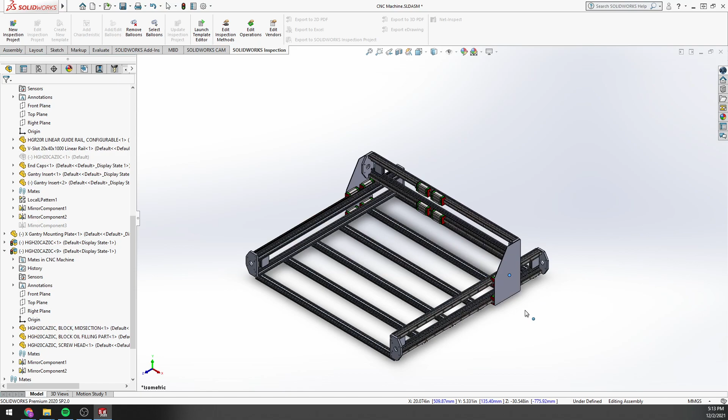You'll notice a handful of stuff still missing from this, and hopefully with my part two update all of these will be included, but we are going to have the motor mounts either here or on the back side. I haven't determined which side I'd like to mount - I'm thinking the motors on the back side, so I have nothing sticking out the front. And then of course I'm going to be using a ball screw through here.

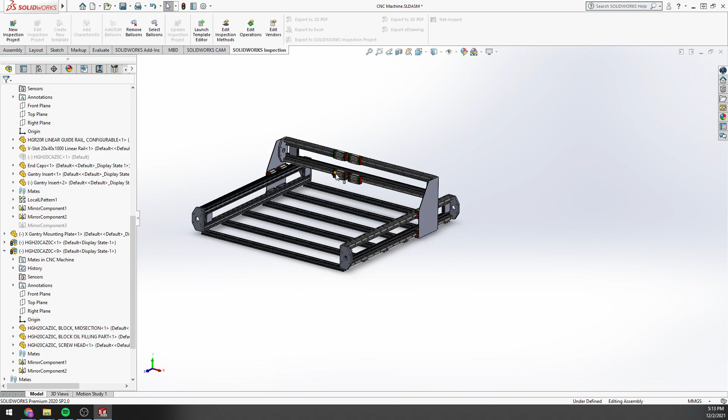In addition to the X and Y axis, we do need a Z axis, and I haven't actually designed that yet, but it will probably be very similar. In fact, this gantry for the X-axis and the Y-axis gantries are the same exact one. I'm foreseeing the need maybe to...

Change some of the design up here. I may have to exclude this and go right to the 80/20 from these mounting plates, but I'm not sure yet. Some of the things I'd like to address are the fact that I don't have ready access to a CNC mill or a laser cutter without spending a decent amount of money. It's not something I'm looking to do.

So these plates in the front and the back for the stepper motors may be cut out of plywood and drilled out, or maybe if I have some maple or oak lying around that I can use, because those might be more rigid. I might make those out of some of those and do printed templates, trace them out, cut them out, and do hand drilled holes.

Of course, that doesn't really give us good precision. I can use my drill press, but it's not going to give us precise measurements for where everything goes, and we may end up with some binding or other issues if those aren't good, as well as the side plates. If we don't have all the holes very accurately drilled out, it could cause some skewing in future parts we make. So if we go that route, the best option would be to try to do any sort of software corrections for skewing if possible.

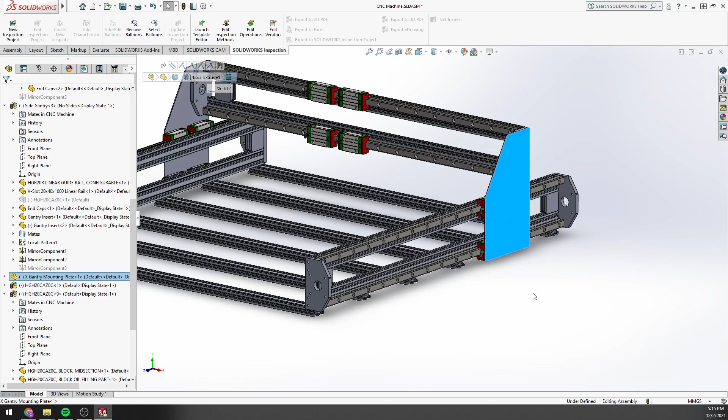You'll also notice there aren't any holes in the side plate. That's because I'm not done defining where these holes need to be, and the mounting holes for the gantry here.

No. Oh, that's interesting.

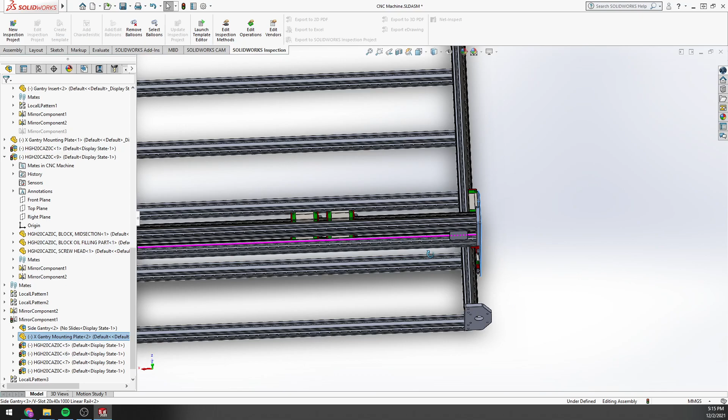These are not... I'll have to look at that later. Maybe I just rebuild it. Nope, these are supposed to be mirrored, so they should be in line with that. For some reason, they're not mirrored properly.

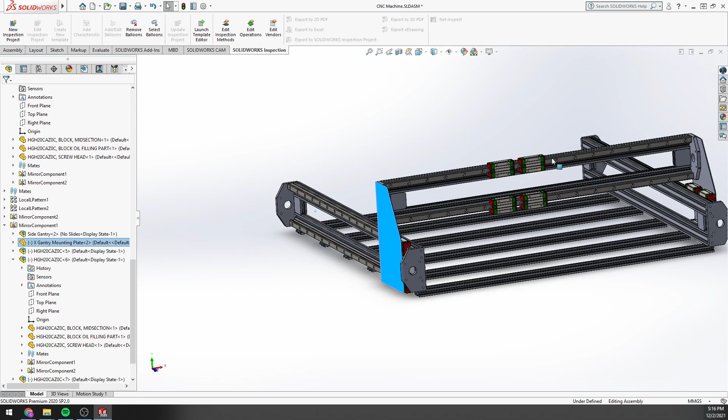Okay, so looking here, this design with the two linear rails and the lead screw down the middle is going to be the same that we're going to use for the Z-axis. Just because of lead ball screws that are available off the shelf, I'm looking at potentially doing a 600 millimeter version of this, which is probably a lot larger than it needs to be.

Hold on, because that's about 23 inches, which is just absolutely ridiculous for that, and I would have to find a good alternative option for a lead screw or a ball screw. I'm not sure if I can actually cut down a ball screw to length, even if I find a buddy of mine. I have to look more into ball screws and if there's restrictions on the actual screw itself, if I can just cut it down to size or not.

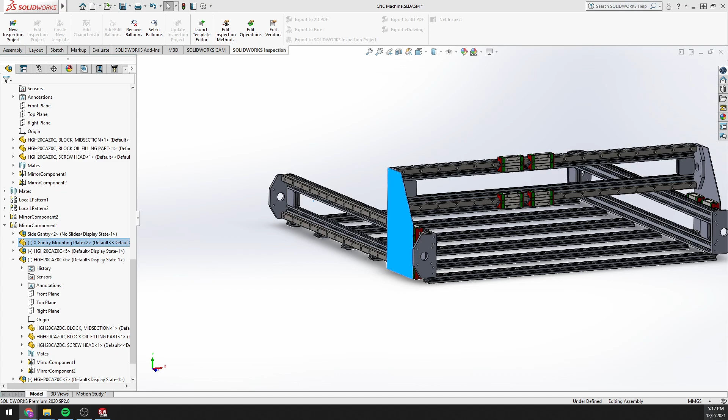If I can, it'll be too easy—we'll just take it, bring it to our buddies, cut it down and put everything back together. So that's my only challenge right now, primarily the Z-axis, and then just modeling and putting in my ball screw models here. I think that should do well enough for me.

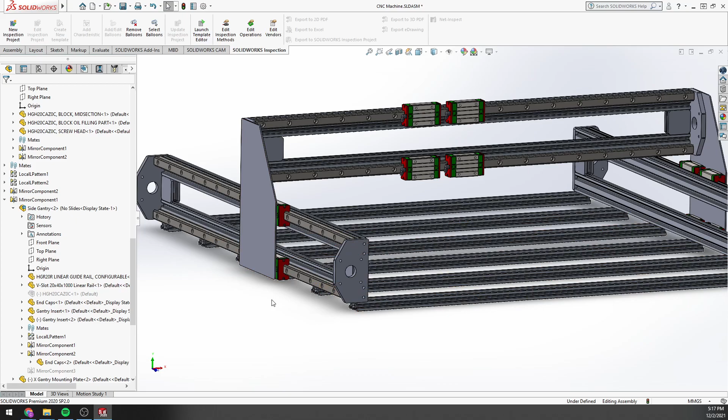Long term, after we get this thing up and running, I hope to make this part and these mounting brackets out of machined aluminum right on this machine. If we can upgrade these parts to aluminum, they'll be pretty strong. I don't doubt that after we get this thing beefed up and upgraded with aluminum, we'll have any issues getting up to being able to do steel.

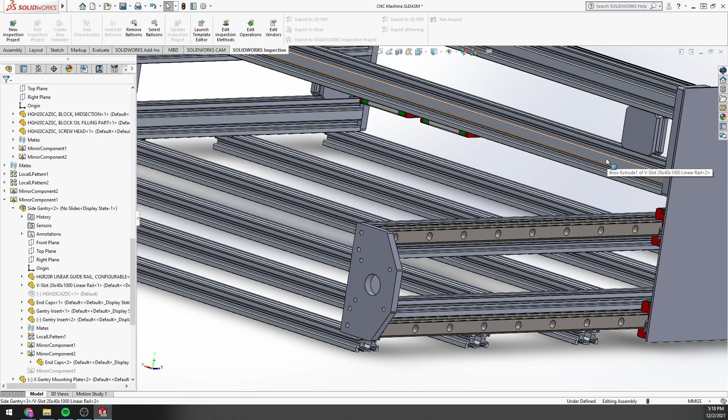It doesn't look super rigid. This is OpenBuilds' V-Slot—these are 20 by 40 millimeter aluminum extrusions. You can see the profile here. They work well if you want to use any V wheels that they offer for this setup, which I'm not opposed to. I'm just contemplating if that's the route I want to go for anything.

I much prefer these linear rails. I think they're very solid, and once they're well lubricated and you take care of them with maintenance, they hold up for quite a while. Especially with the ball screw, I think that'll be the easiest way for me to go instead of relying on the wheels to stay in shape and deform over time. With higher force, with potential steel, I think these are the better option.

However, the aluminum extrusion is still great. I might be able to save some money by going to 80/20 aluminum extrusions, but I'd have to look at the cost on those, and I think the V build is actually cheaper right now.

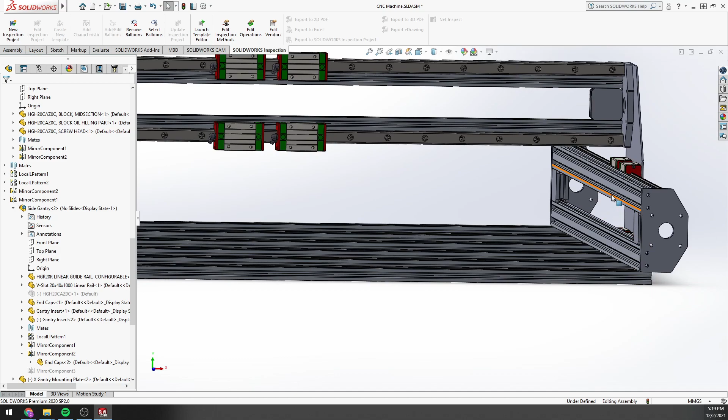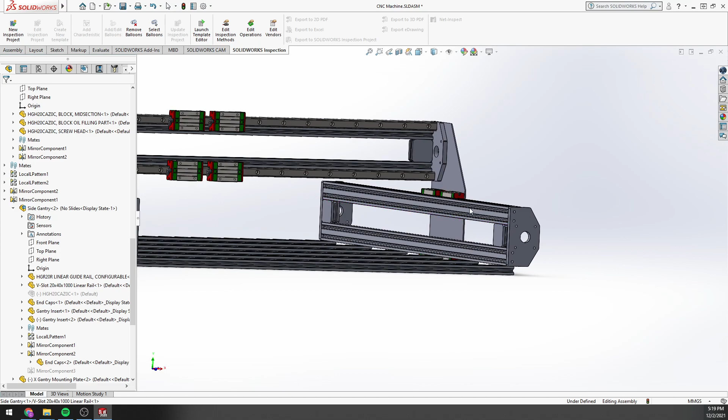Some other points of upgrades that aren't shown here that will later show up in maybe an upgrade video—once I can do some aluminum, I have to figure out how I can do a half part routing with a little bit of indexing, then rotate and flip a piece of sheet stock, because I'd like to make plates for this whole section here and the section on top. That should help make things more rigid, going all the way around the back with one frame piece as well as the back here. I think that will help significantly.

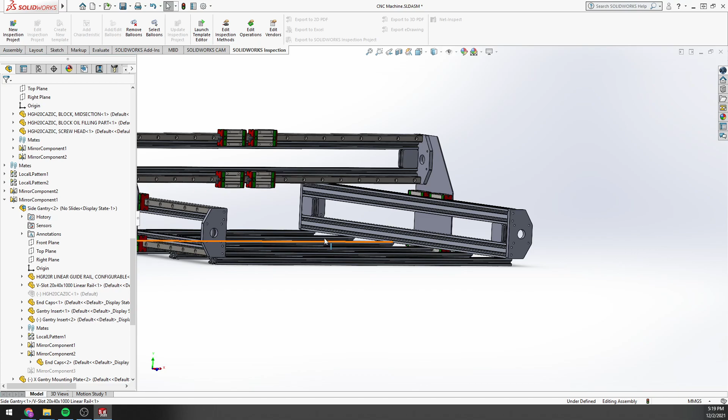Also on the side motors, it'll help keep any debris from going out into the ball screw. Unfortunately, I don't have a debris prevention plan for the upper section of the CNC.

As far as a spindle, you probably saw this page flash up earlier. There's actually a group which I will plug here—it is PrintNC. PrintNC has a similar but a little different approach—their goal is to use metal tubing, 3D print some parts, slap everything together, and boom, you've got a CNC router slash mill.

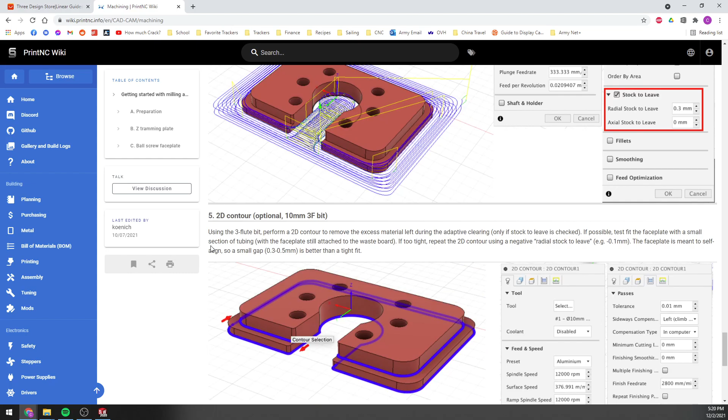And these are actually pretty good—they're rigid. You can see on their site they have some things for machining. I think there's a video of a guy machining some steel. That's how I found out about this, on YouTube and through the Hobby CNC subreddit.

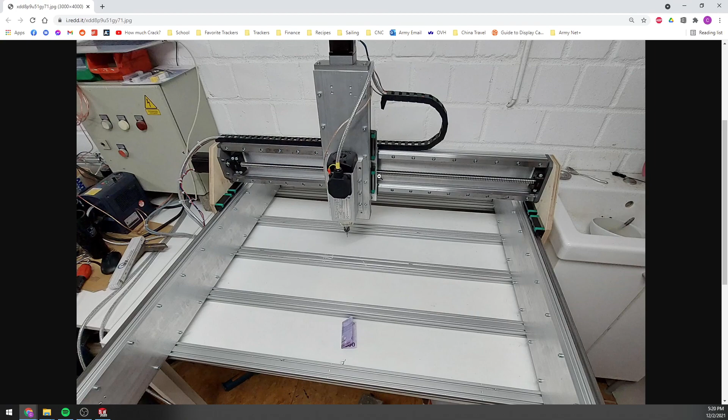By the way, I do have to give credit—my design was heavily inspired by a machine that I saw on the Hobby CNC Reddit. You can tell it's almost an identical build. There are hopefully going to be a few things that I'm looking to change.

Obviously, I would like to approach it from a different type of design compared to his, where his has these heavy metal pieces—I can't remember, I haven't seen the previous one. I think he said he had some wood here before, but I don't. I would never want to have these nuts sticking out the end from these bolts and things like that. But this is kind of where I started, with a design very similar to this.

So I did a lot of research, a lot of looking around. Now the 3 Design Store from the PrintNC Group supplies a relatively affordable $400 kit. It looks like it includes—well, it might not include everything, I might be missing some stuff—so it includes, this $400 kit is just the spindle.

So it's the spindle, the variable frequency drive—the VFD, or as they call it, the inverter. This has a spindle clamp, and it's a 2.2 kilowatt inverter and 2.2 kilowatt spindle. The other guy that I showed you his design, he was using a 1.5 kilowatt spindle, and he was still able to do steel with the design that he had.

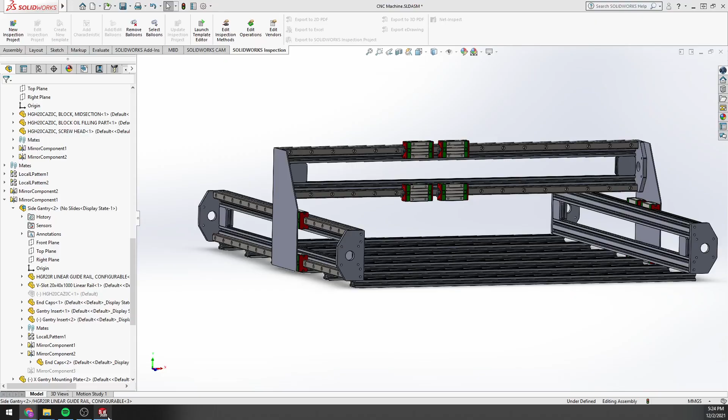And if you look at this build, the actual build area here, in each axis, each gantry is 1,000 millimeters. So I would lose... Right now, I'm at about... I estimated, so this is about 36 inches across from here to here. I believe, maybe it's a little less. Yeah, about 36 inches from there to there.

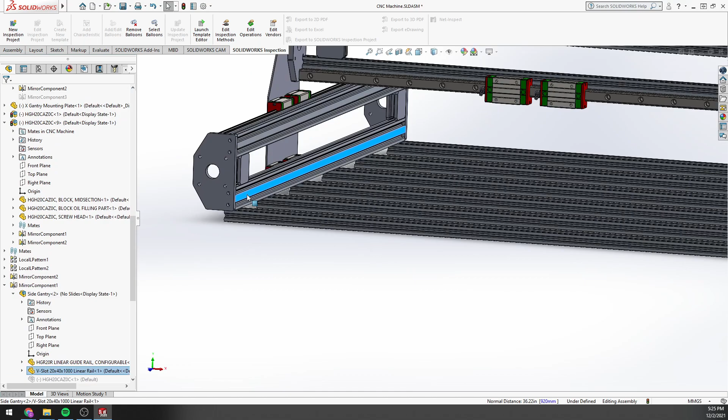And after I center out my X gantry with where the spindle will align, I'm only going to have about 32 inches wide. And because I want to do some larger pieces, this will inhibit me from being able to do that if I want to drop down to 700 millimeters.

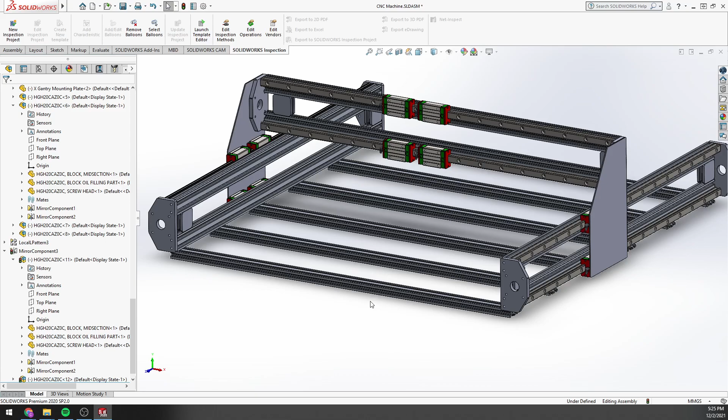Now 700 millimeters, I'm dropping down like 200 millimeters, or give or take around 7 inches, right? And so I don't want to give up that much space in my X axis, though I could. I guess I'm going to price things out and see where it sits.

Because their total kit is 1,050, so what I would have to do is source the linear rails and the probe and the ball screw kits. I need to be able to source all of those and my end stops for around $400, which I think I can.

And I was looking at other spindles and other items from another vendor at Vevor. Of course, this is way much more in the cart, but let's take a look here. You can see they have some linear rails with ball screws, so it comes as a kit. However, they don't have a 250 millimeter version, they only have a 600 millimeter version, and so this is for my Z axis.

Now they do have the 1,000 millimeters that I need, but by the time I get my three kits, that's already almost $400, and that's not counting getting any of my additional end stops or endpoints. So I think if I get the end stops and the probes, we'll be sitting at around the same price.

So now it needs to come into: am I willing to give up, in order to use this one kit, all of the space on my x-axis? And one thing that comes from giving up some of the space is a little bit more rigidity, so it should be more likely to do a little bit of steel.

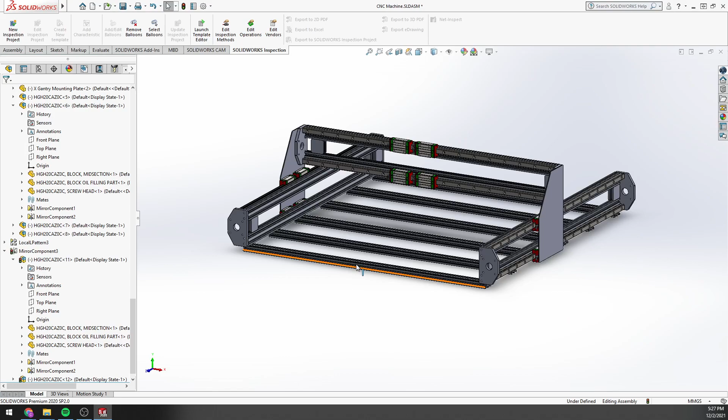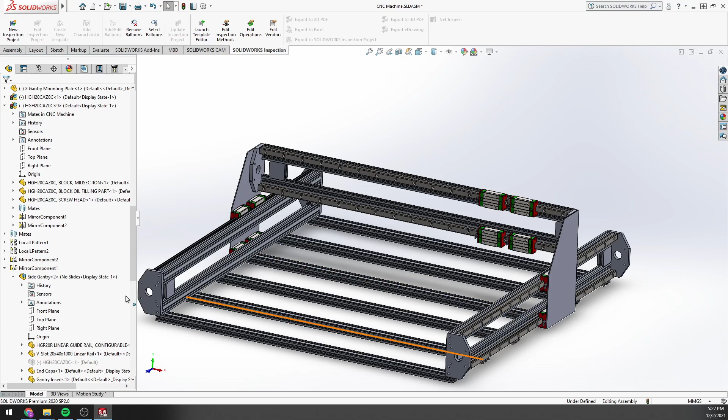So, that's in summary kind of where I'm at. I'd love to hear some recommendations, any sort of advice or questions that anyone might have about this DIY CNC planning, because I'm just getting started, but it's a very exciting project, and I look forward to showing everyone progress as we go on. Thank you.